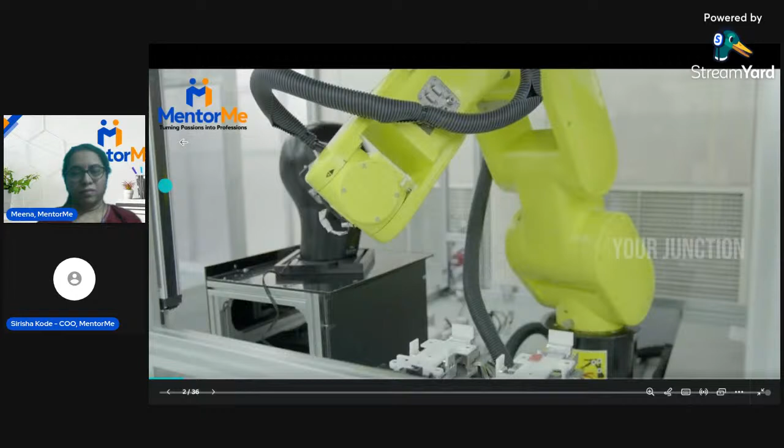Okay, so you had watched a video. Can I see some engagement about what you have just watched? I asked a question, right? Are you ready to explore the future? And then we watched a video. Can I have a few audience responses on the chat? What you have just watched, in just a few words?

Sirisha, what's your thought about the video? As we get a few responses from the audience, I think it's very amazing to see how robots are doing most of the manufacturing in Samsung, right? If you see, there were a lot of robotic arms that were working along to pick up the phone, to assemble various parts in the phone. Even if you see the testing, the drop test that happens is through completely automated through robots. And also, if you see companies like automobile companies, like say BMW, their assembly line, paint line is mostly automated with robots.

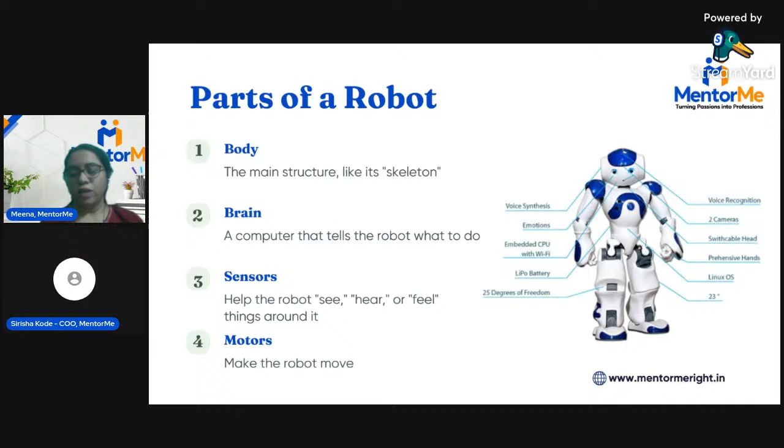Shrenika says it's sensors - she feels that without sensors, it is very difficult for the robot to function. Rakesh says brain, Sriram says brain, Sangeeta says CPU or its brain. Awesome, yes, each and every part is very important for the robot to function efficiently. The brain, or computer, is really essential, but the sensors are equally important, and the motors are also important if you want the robot to function properly according to your requirement.

Great, we have a very good audience, wonderful audience. So the next question is another image here. What does this robot do? What is it used for?

Yes Rakesh, Rakesh's answer is the first one for this. Awesome Rakesh, cutting grass - it is a grass cutting robot. Yes Kavita, Rishi - garden grass cutter. TBG boy says robotic lawn mower. Used to cut the grass, cutting grass.

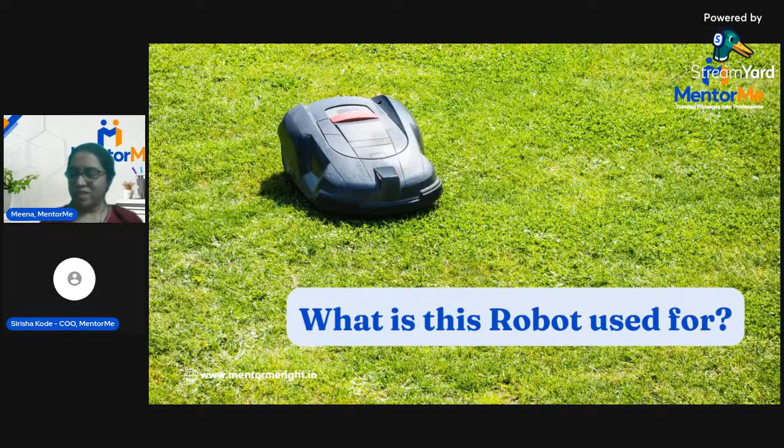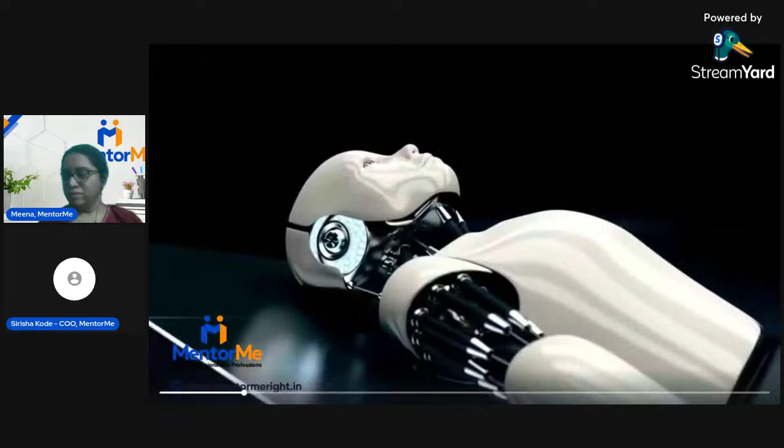How do humanoid robots look like? Humanoid robots are built with a design that resembles a human body with arms, legs, and head. Some of them even have faces that can smile or show different expressions. They come in all sorts of shapes and sizes, just like humans.

Do they talk and listen to humans? One of the coolest things about humanoid robots is that they can talk to us and understand what we say. They have special sensors and microphones that let them hear our voices, and they can use their speakers to talk back to us. This makes them fantastic storytellers and teachers.

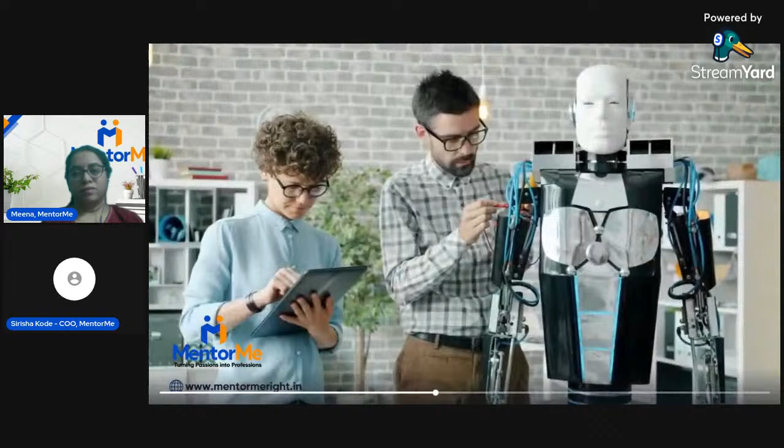Do you know if these robots can walk and move like humans? Humanoid robots have special motors and joints that help them walk, run, and even dance. These robots can move their arms and legs just like we do. Some of them can even jump and do flips - it's like having a robot friend who can do fun things with you.

What can they do for us? These amazing robots can do many things to help us. Some of them work in hospitals and help doctors and nurses during critical surgeries. Some robots can work in dangerous or hazardous environments like deep oceans or in space and do complex jobs. While some of them can drive cars, they can work as receptionists or cashiers at stores. They also help us in household activities like cleaning house.

We can learn a lot from humanoid robots. They can be our friends and companions, helping us when we're feeling sad or teaching us about the world. We can also teach them new things, like how to play games or draw pictures. It's like having a buddy who's always ready to learn and have fun with us. Humanoid robots are like the friends of the future - they look like humans, move like us, and can do incredible things to make the world a better place. Humanoid robots are amazing creations that show just how smart and creative humans can be. That's all for now.

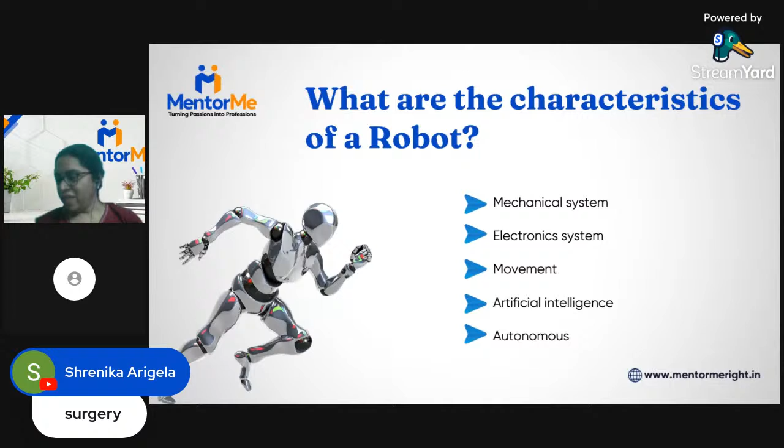They can take up important, dangerous jobs which are done by humans, like in hospitals and space. Yes, so it's very important that in certain places where humans cannot work, these humanoids are able to easily replace our role, right?

They are built with artificial intelligence. And what are the characteristics of a robot? They have a mechanical system, they have an electronic system, they have movement, they have AI, and they are autonomous, they are independent, they are able to do certain tasks with very limited supervision from human beings, right?

Okay, Pranesh, got it, Pranesh.

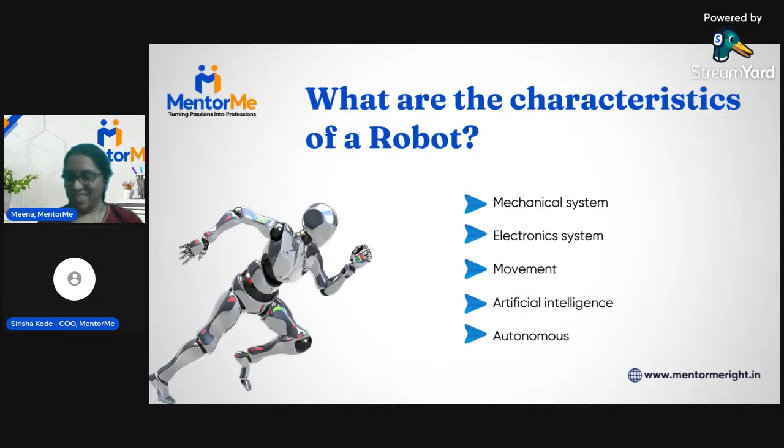So we know that we have seen an interesting robot movie, right? Which movie is that, Robot in Action, where you realize these robots must follow certain rules. If they don't follow the rules, what happens? We have seen the harmful effects as well, right? Which movie is that? Can you recall the movie name in which you have seen the harmful effects?

2.0, says one student. By Rajnikant, Robo. Yes, what is the name of the robot in the movie? Right, kids?

Google Kuttappa, okay. I can see Raga says... that could be the name, or just the email ID. Chitti robot, Pranesh, right? Shrenika says Chitti robot, Rishi, Taruna, Pranesh. Yeah, everyone knows the name of the robot, it's Chitti robot. When there are no set rules followed, the robot can behave in its own way, but that is not ethical, right?

So let us see the important laws of robots. A robot may not injure a human being, or through inaction allow a human being to come to harm. A robot must obey orders given to it by human beings, except where such orders would conflict with the first law. This means by not being active, if it is causing any harm to human beings, or it shouldn't cause any injury to the human being - this is the first law, right?

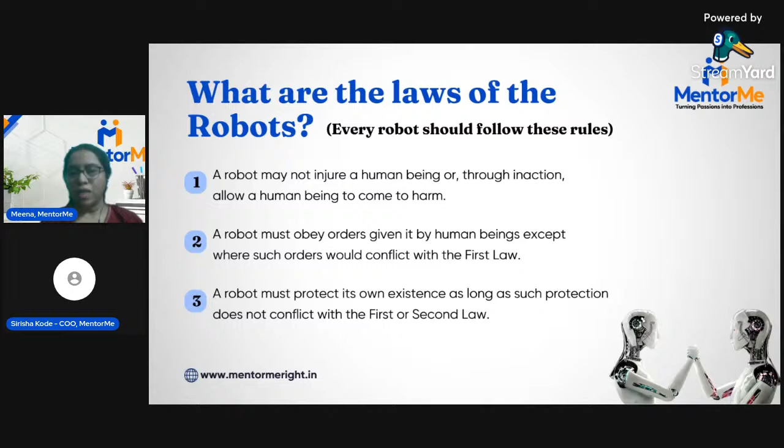So the robot must always obey orders given by human beings, except if it conflicts with the first law. And the third important law says a robot must protect its own existence, as long as such protection does not conflict with the first or the second law. Basically, helping is very important, but not causing harm is the priority for the robot. Okay, so safety first.

We have seen a lot about robots. Now, coming to robotics - how do we define robotics? Robotics is the science and technology of designing, building, and using robots. Robotics is used in factories, homes, hospitals, and even in space exploration. We have seen how humanoid robots are able to help us in different industries in the video. So the science and technology of designing, building, and using robots is called robotics.

What do we learn in robotics? We will learn how to make robots move, how robots will be able to see and feel things, and how we tell robots what to do. The ways in which we tell robots to do certain work is programming, right? We learn to code and instruct the robot how to do a specific task, using robots to help people and do cool stuff. We are going to see a few samples today of how robots help people in very simple ways, since most of you are in grade 5, 6, 7 in this group.

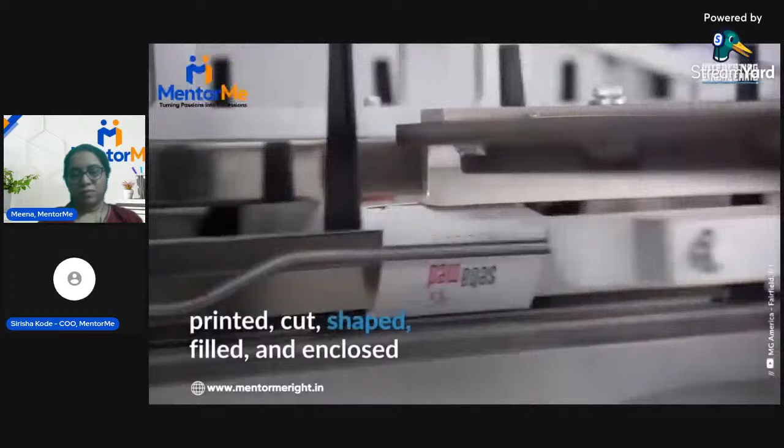I can see the excitement in the audience.

The robots don't get tired. All we have to do is charge them. Precision - the robots perform consistently and repeatedly with high quality. They can work in hazardous situations, as we have seen in deep oceans. And safety, flexibility - they can be programmed and modified based on the requirement. However we want the robot to work, we can code it accordingly. So these are the advantages of robotics.

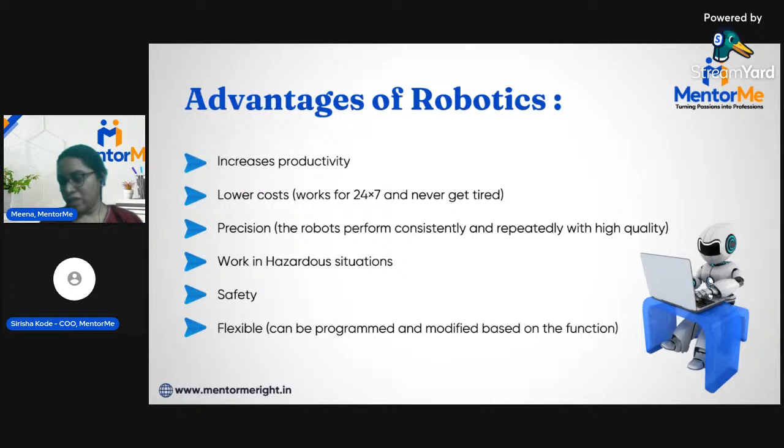Now I have a very simple question for you all. What is a machine? We all use machines in our day-to-day life, different machines. So a machine is a tool that helps us do work easier and faster.

A machine can be simple or complicated. Some of you learnt about simple machines, right? Scissors, knife - these are all simple machines. Screw, lever. But what are the complicated machines? They are assembled with the help of simple machines. So a machine can be simple or complicated, but all machines help us get things done. That's the definition of a machine.

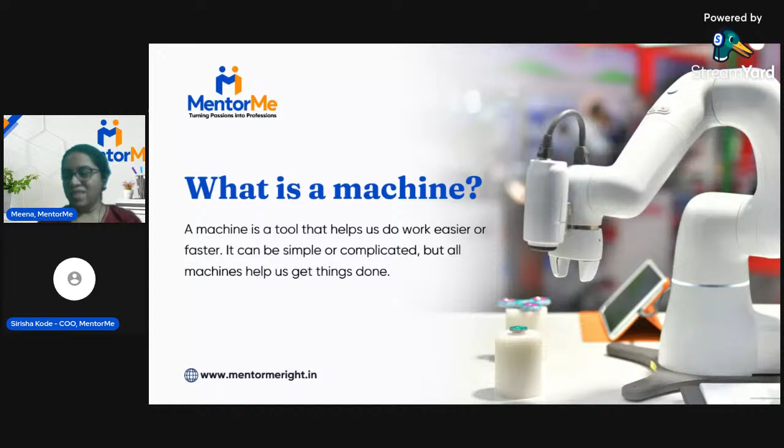So some common examples of machines are bicycles. You all should be having one, riding one. Bottle openers, can openers, washing machines. Now almost every home has a washing machine, and most of us use one on a daily basis. And of course, computers - these are all examples of machines.

So what is the difference between a robot and a machine? Machines follow fixed steps, but robots can make simple decisions. Machines don't sense their surroundings, but robots have sensors - just like we have sense organs, a robot has its own sensors. Machines often do one type of movement, whereas robots can move in different ways, sometimes like humans or animals.

Machines usually do one job, whereas robots can be reprogrammed for different tasks. They can perform different tasks based on the program we code them with. Machines don't have artificial intelligence, whereas robots use AI to make choices. These are some of the differences between robots and machines.

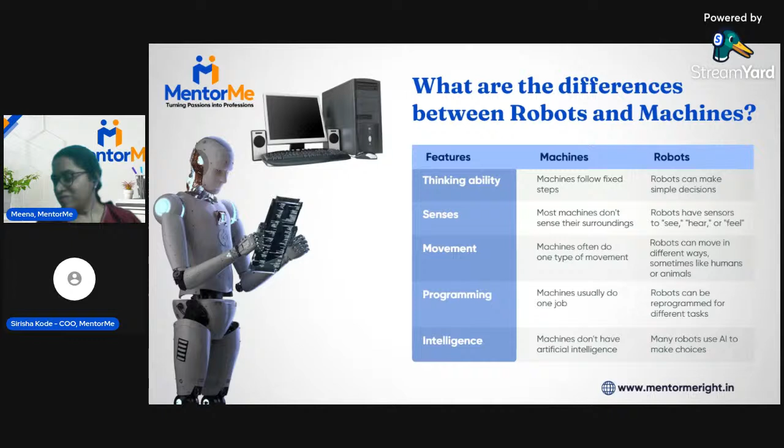So the next question is, are all machines robots? Is a bicycle a robot? Is a washing machine a robot? Though we have washing machines which are very well automated - nowadays we can even use Wi-Fi, a remote, or an app through our phone to operate them.

So not all machines are robots, but all robots are machines. Some machines can be turned into robots by adding a brain, that is a computer, along with sensors and special programming, right?

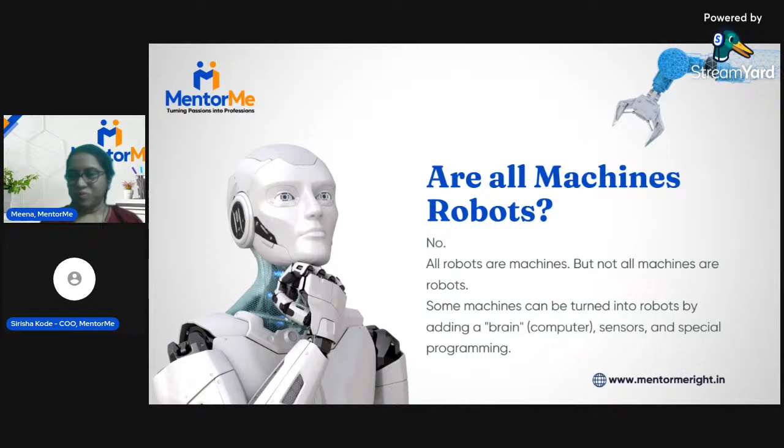So now we will learn about the features of robots. Robots have a brain which helps them think and make decisions. Robots have sensors to understand their world - they can see, hear, or feel things around them. Robots can move in different ways - some roll, some walk, some fly, or some can even swim, based on the movement we enable them with.

Robots need power to work, right? So they can use batteries, electricity, or even solar power. Robots are built to do specific jobs, and they can be programmed to do different tasks. So the brain power, sensing abilities, movement, energy source, and task performance - these are the key features of robots we are talking about now.

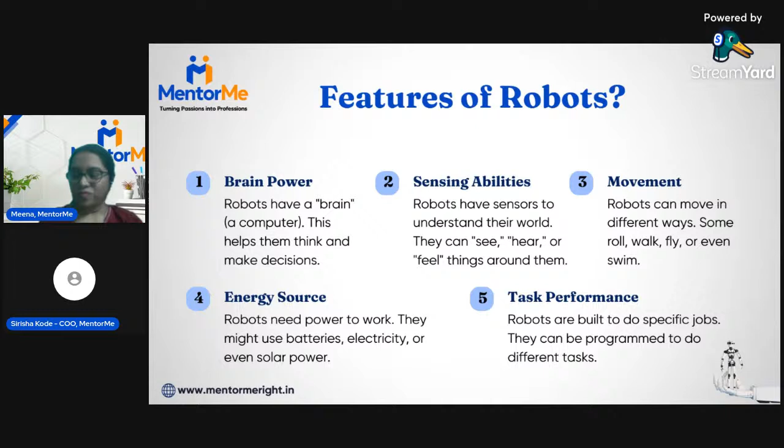And there are different types of robots. I'm just giving you the names in today's webinar, but once you enroll for the robotics training course, you will get to learn more about them. KUKA robots and Asimo robots are a few sophisticated robots which can perform great tasks. KUKA is used for manufacturing, and Asimo is used to help and assist people.

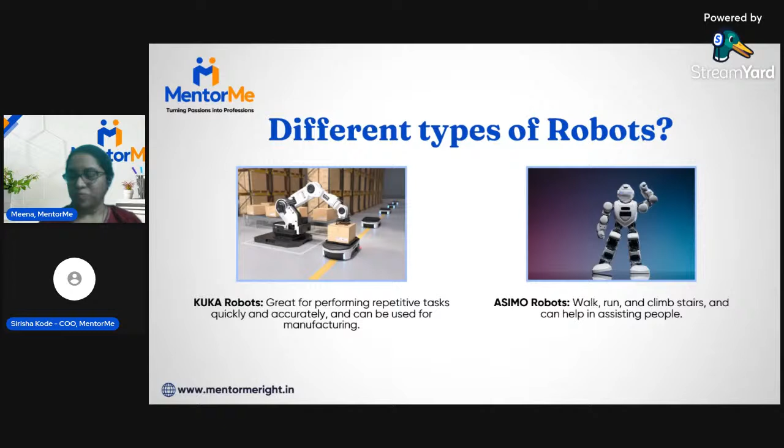And you all very well know we have a live quiz game coming up very soon, so please get to know about these different types of robots. Boston Dynamics Spot helps in navigating tough terrains and can perform tasks like opening doors. Sirina, a human robot, interacts with people, understands speech, and can be a friendly companion for learning and assistance. There is another interesting robot named Sophia, again a humanoid robot.

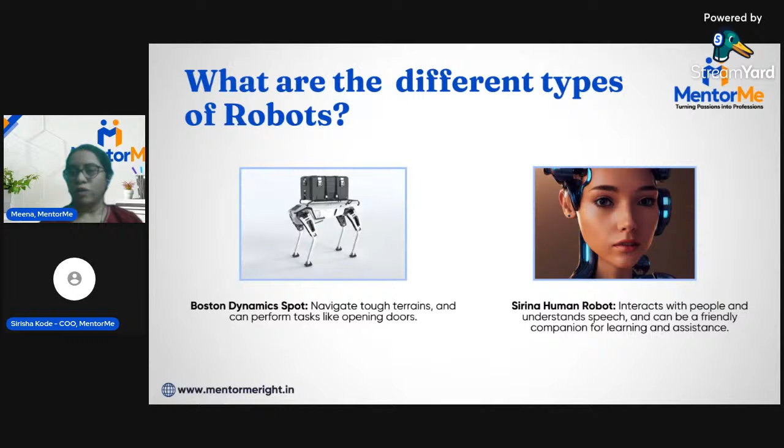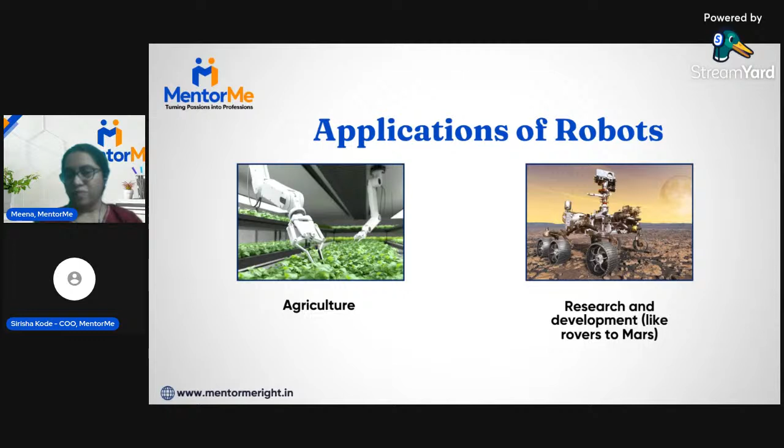And robots have great applications in many different fields, right from the medical field, manufacturing industry, agriculture, research and development like rovers to Mars, and of course at homes and in education. We have seen so many different types of robots right from the beginning of this webinar, and we know how robots are really useful in different places - yes, research as well.

Now comes the most important part. You've had some kind of theory going on all this while, now comes the practical aspect. We are going to have the robotics live project. Are you all ready to learn how to build a smart bin?

We all use dustbins at home, right, different types of bins. What if the bin could be made smart? Yes! So I'm going to stop the screen share for some time, and we will have Santhosh joining us.

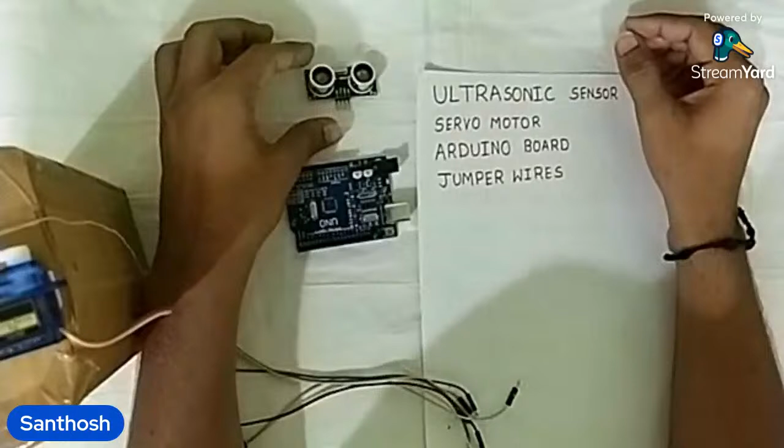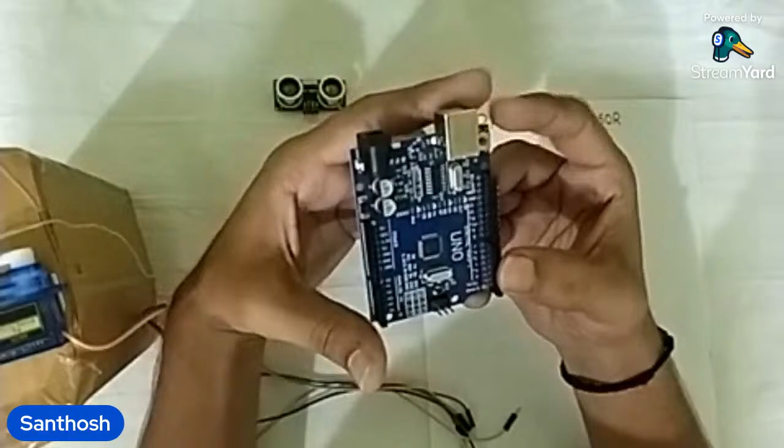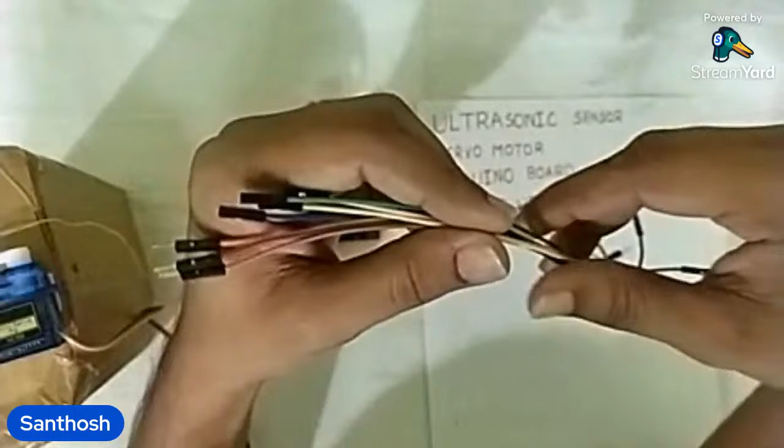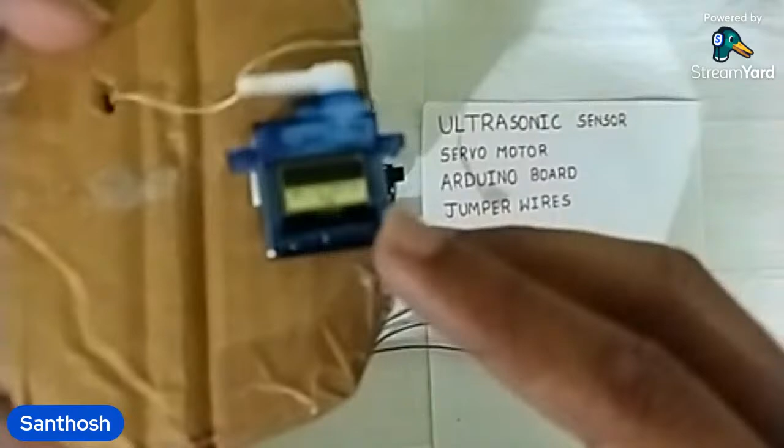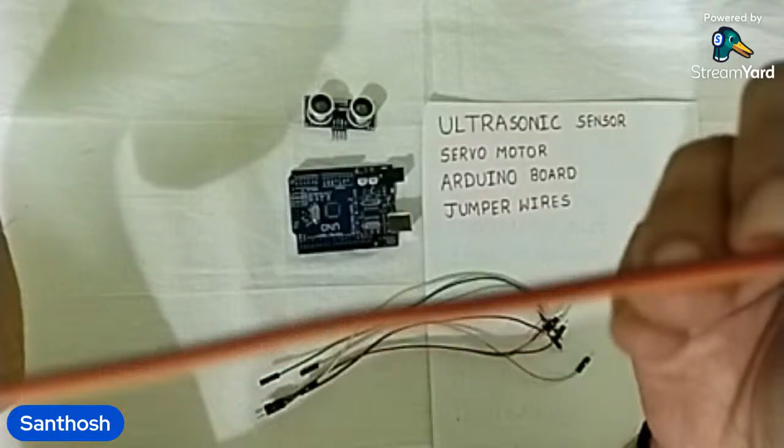Here we can see connecting wires, which are used to connect the components. And here we have the servo motor, which we are using to lift up the lid of the dustbin. It has some wires you can see: one is for ground, VCC, and the other one is for signal.

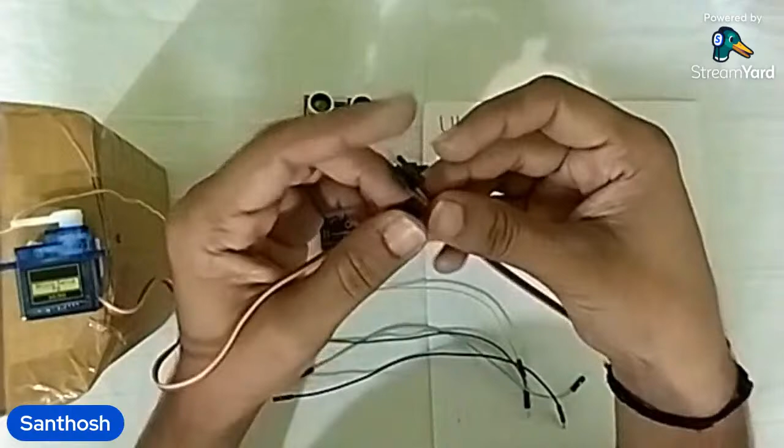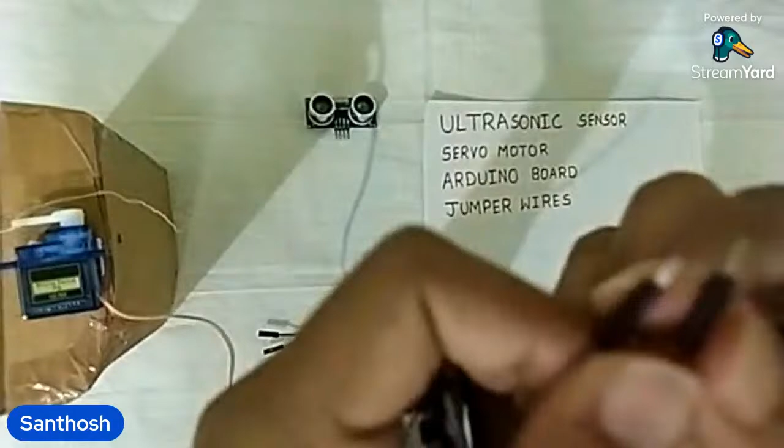Now let's connect our servo motor to the microcontroller, that is the Arduino board, with the help of some jumper wires. I'm using some colored jumper wires. We have connected some extensions from this servo motor to the Arduino and will fix this to the ports. This red colored wire indicates VCC, this brown colored wire indicates ground, and this orange colored one indicates signal.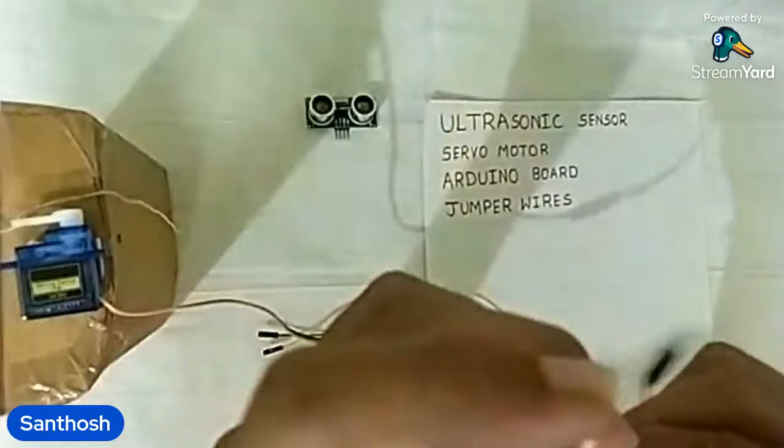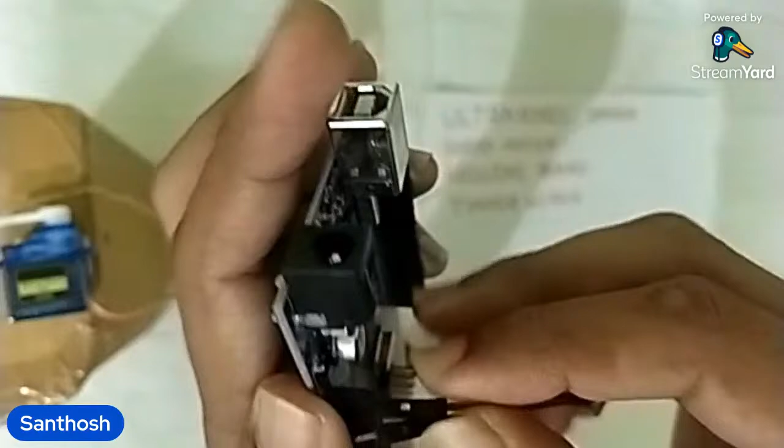Now I'm going to connect VCC to the 5 volts here on the Arduino board. You can see some holes to connect the jumper wires, so I'm using the 5 volt pin here, and the other one is for ground. This orange wire is for signal, which I'm going to connect to digital pin 3.

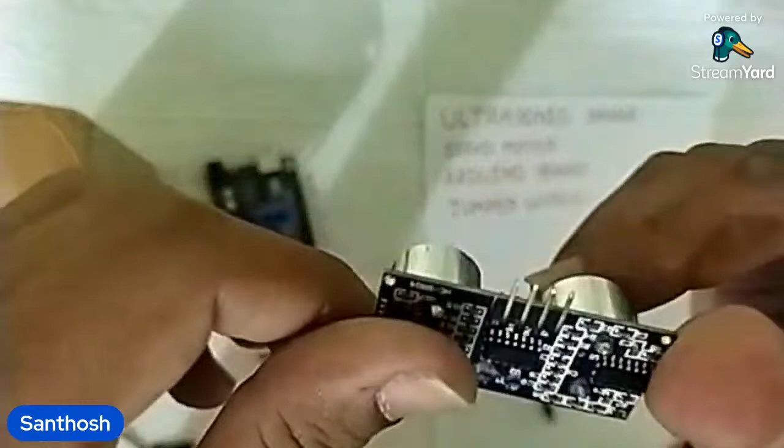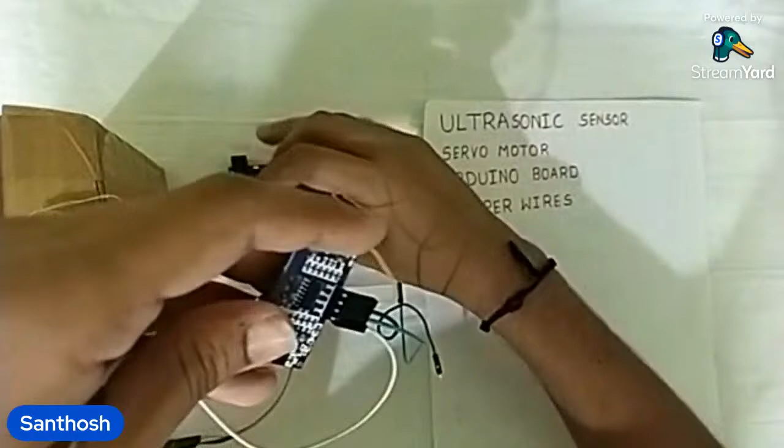Now let's connect this ultrasonic sensor. You can see some pins present here, and I'm going to use female to male jumper wires to connect it to the microcontroller, the Arduino board. Here the ground is the gray colored pin, and for VCC I've given the yellow wire, which I'm going to connect to the Arduino board's 5 volts.

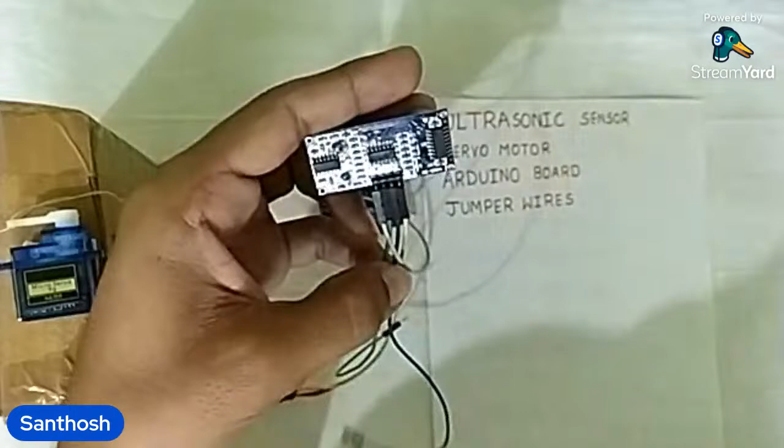This gray colored wire is for ground. You can find two other wires that are for echo and trigger: the orange colored one is echo, and the blue colored one is trigger. Now I'm going to connect these to the digital pins: trigger pin to pin 9, and echo pin to digital pin 10.

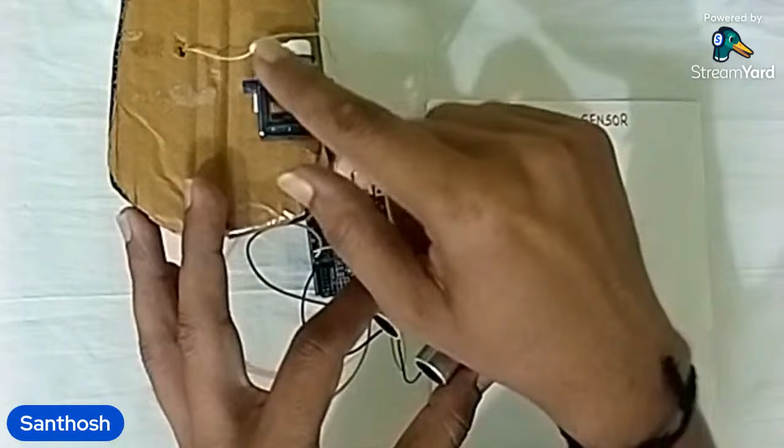You can see here I've connected everything. Now what happens when I switch on this Arduino board? This ultrasonic sensor will send some sound waves to detect, and at the output, the servo motor is going to open the lid of this smart bin.

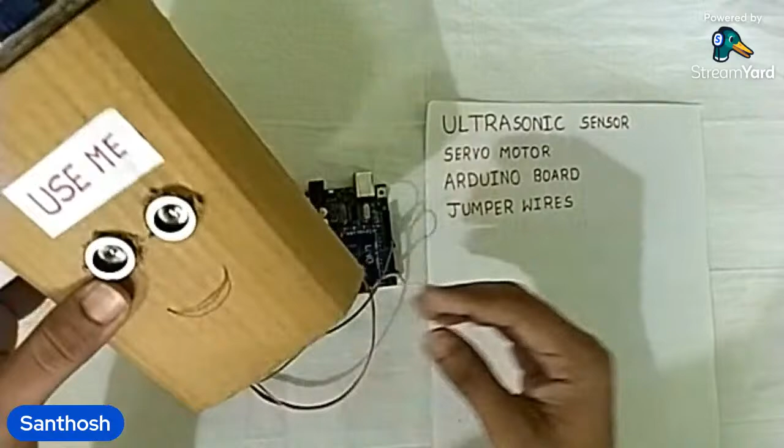I've made this with the help of some cardboard, a cotton box. You can use any other items to make a smart dustbin too. I made it like this and named it 'Use Me.' I'm going to put this ultrasonic sensor here. So, the smart bin is ready.

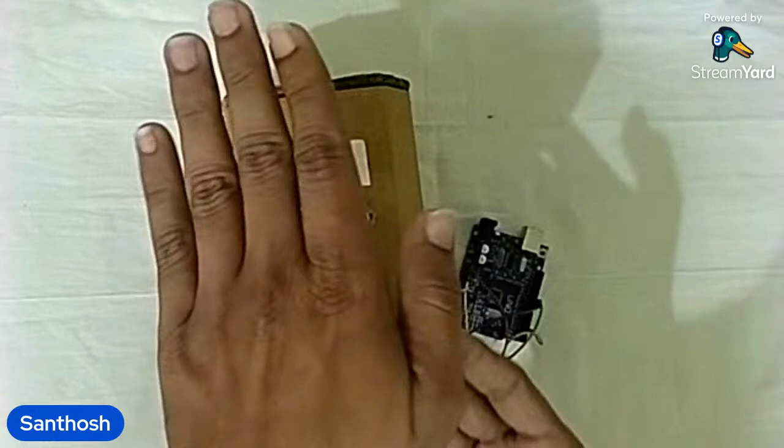Now I'm going to connect this. We need some program to control these operations, so the ultrasonic sensor should do some work. It's going to send some signals, so when I place a hand here, the lid is going to open. To make that work, I'm going to use some coding, that is Arduino-based coding.

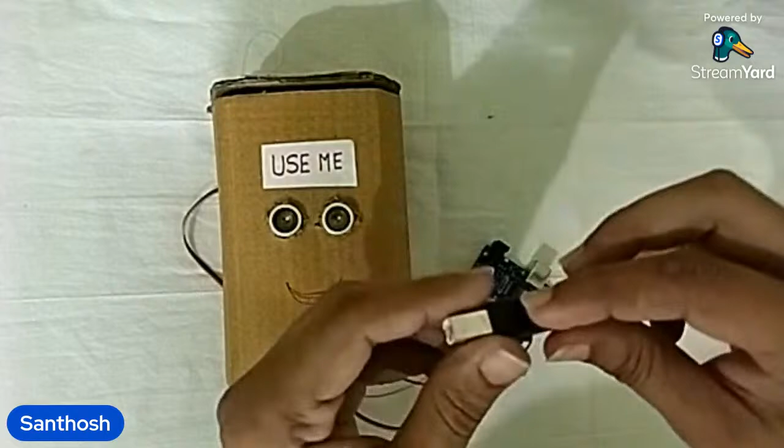I'm sending this with the help of a data cable from my laptop. Now it is connected. I'm going to dump some code into this.

So it is done. Now when I place a small dust particle or something, it's going to open the lid. So in this, we can put some waste papers into this lid. You can see, right?

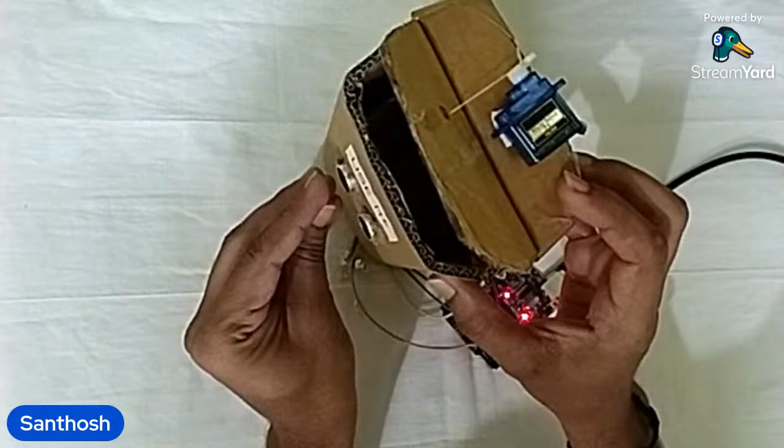So this is also how we can make a smart dustbin. Here you can see when I put something, it's going to open the lid so that you can put some waste papers into this bin.